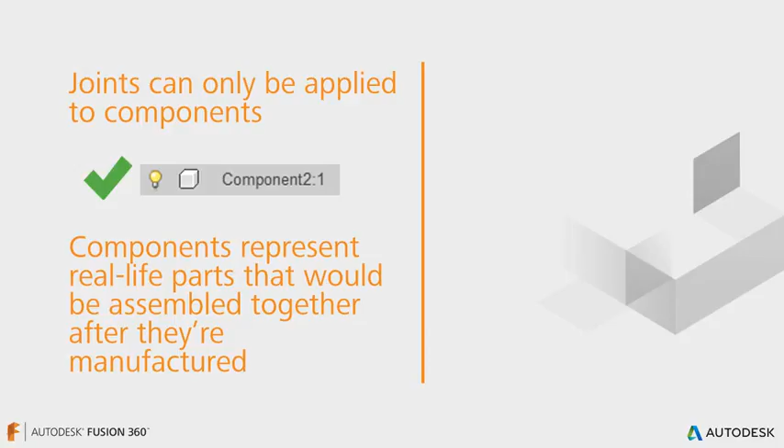In order for the components in an assembly to be positioned correctly and have the desired mechanical motion, joints are applied to control their movement in the assembly. Joints can only be added to components, which represent real-life parts that would be assembled together after they're manufactured. Bodies can't have joints added to them, but components can be created from those bodies and then have joints applied.

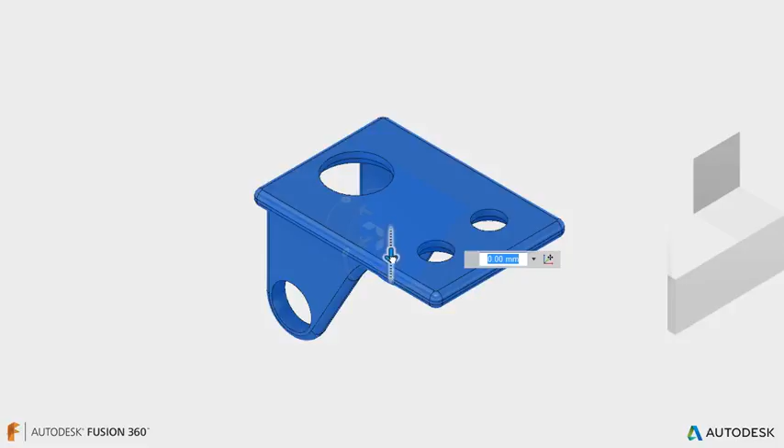Each component has a total of 6 degrees of freedom, meaning it can move in 6 different ways. It can move translationally along the X, Y, or Z axes, or it can rotate around each of these axes, totaling to 6 different degrees of freedom. Joints are used to limit these degrees of freedom, leaving certain ones open to mimic mechanical behavior.

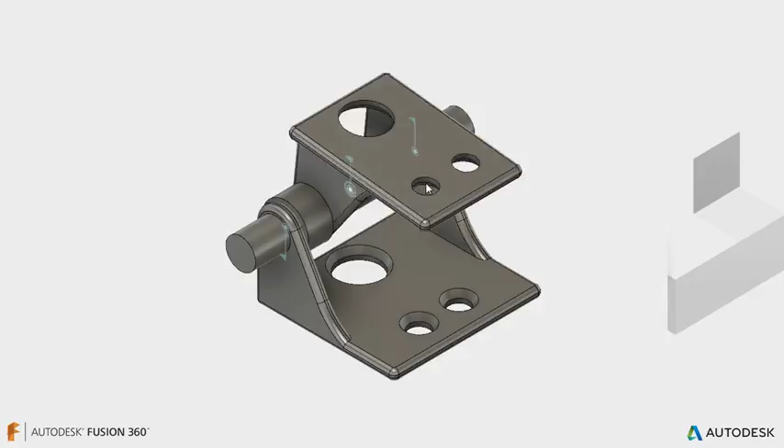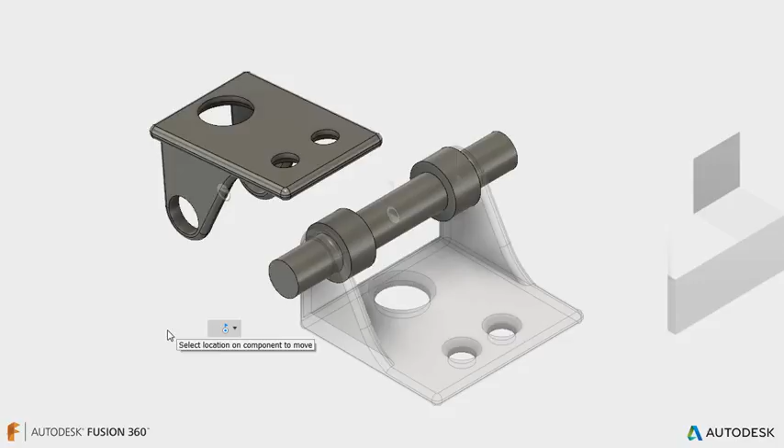In order for joints to be applied, reference geometry must be selected on both components to relate them together. If you've used other CAD software before, you may be used to selecting faces and edges to relate parts to one another. In Fusion 360, all that you need to select is a single point on each component to relate them together. These 2 points will then snap together, with the first component moving to the location of the other.

Whenever a joint location is selected on a component, this glyph will appear at that spot. It is a white circular disc with one of the halves cut out. This shape indicates a few details about how the components will snap together. Let's take a closer look at this glyph.

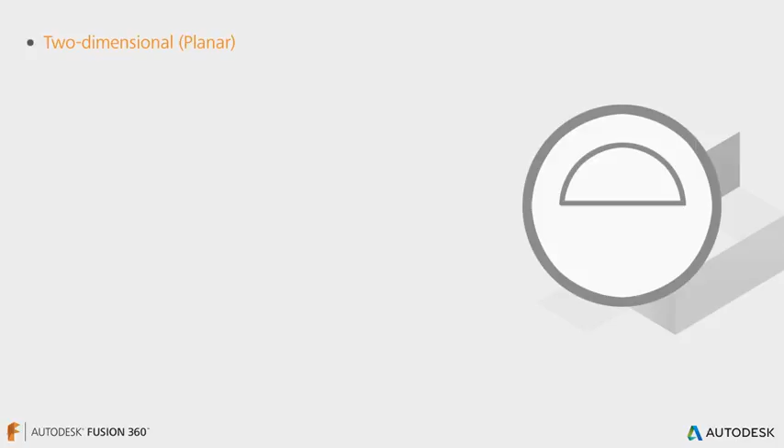The first aspect is that it's two-dimensional, or planar. In Fusion 360, joint origins always snap together so that these planar faces are overlapping, making the orientation of this glyph extremely important for orienting the components correctly. Even if the joint origin is specified at the right location on the component, having the face oriented incorrectly will still keep the 2 components from lining up correctly.

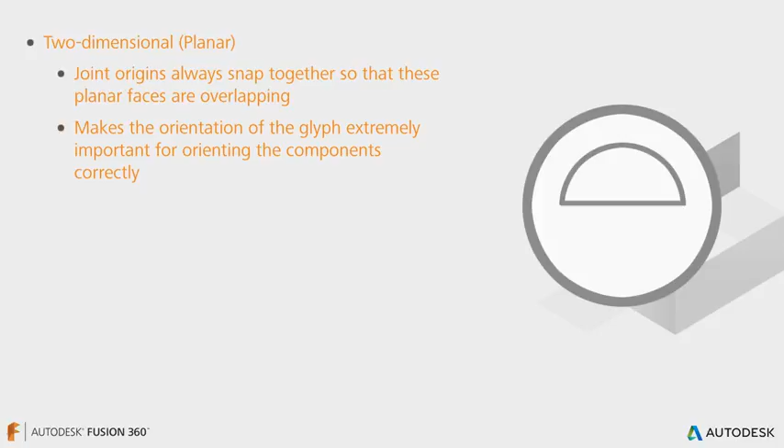The second aspect is the orientation of the cutout. This corresponds to a coordinate system, where the X and Y axes lie within the same plane as the glyph, and the Z axis points outward, normal to the plane. Additionally, the X axis runs along the flat edge of the cutout at the center, and the Y axis points upward in the direction of the circular edge. This orientation is consistent for all joint origins.

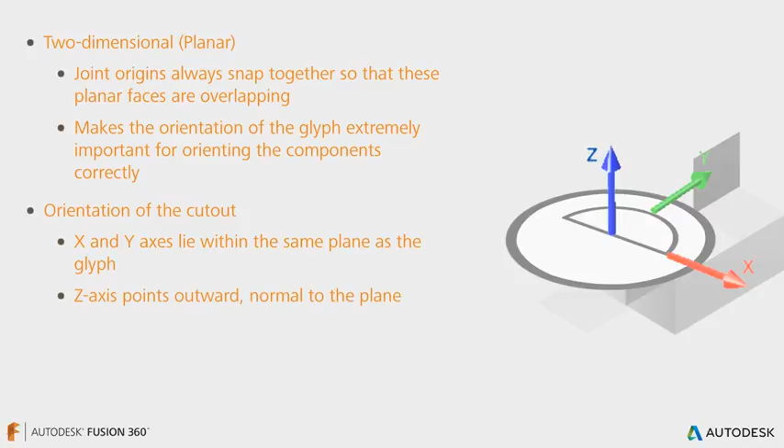Now that you're familiar with the orientation of the joint origin, let's select 2 joint locations on these components and see how they snap to one another. I'll enable the joint command, and I want this component on the left to match up with the one on the right. I'll hover over the front face, and I can select any of the joint locations automatically generated in Fusion 360. Notice that the joint glyph's plane aligns with the front face of the component, and the semicircle faces upward.

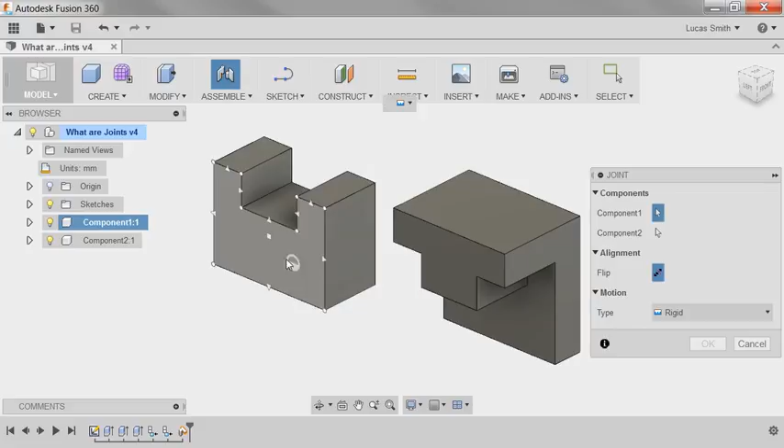Comparing this to the same point on the other component, I know that these 2 outer faces of the components will line up, since the joint origins' planes coincide with the front faces. Additionally, the cutouts are both pointing upward, meaning that these 2 components will snap together in their current orientations. I'll select the joint location on the left, and then the one on the right. And the 2 components snap together at the specified points.

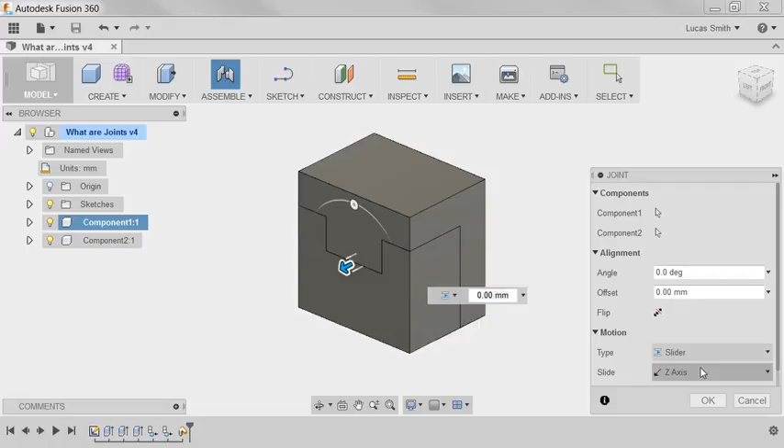In this case, the components snap together opposite the desired orientation, and I can switch the orientation simply by clicking the flip button in the dialog box. Now these 2 components line up as desired. All that needs to be specified is the joint type, which will open up degrees of freedom for the components to move. In this case, I'll select the slider type, which allows for translation along a single axis. Now, the 2 components move as expected, and were aligned to one another by selecting individual points on each component.